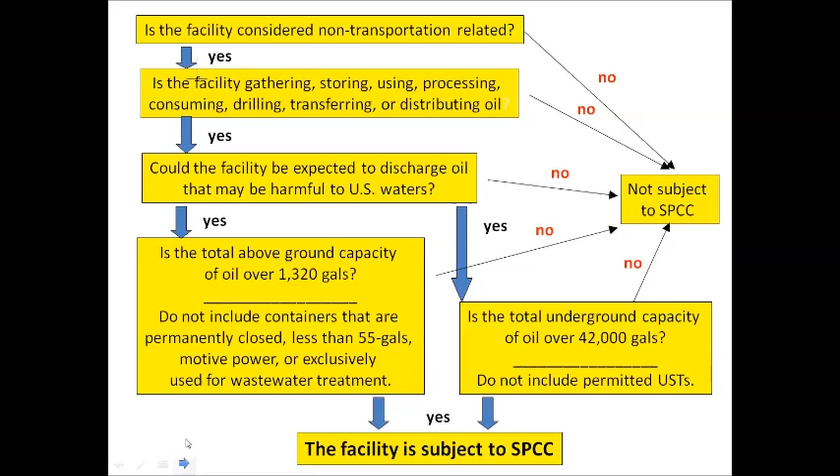I want to invite you to pause these slides on occasion if you want to study them. This slide basically is trying to give you a little chart for whether or not you need an SPCC plan. I put it here for a review for your study.

This is typical of what I see for ag tanks on farms. They're single wall tanks. They don't have saddles or rails. We call them skids sometimes. A limited amount of openings at the top. They basically were planned to be on stands, but obviously they got used in different ways.

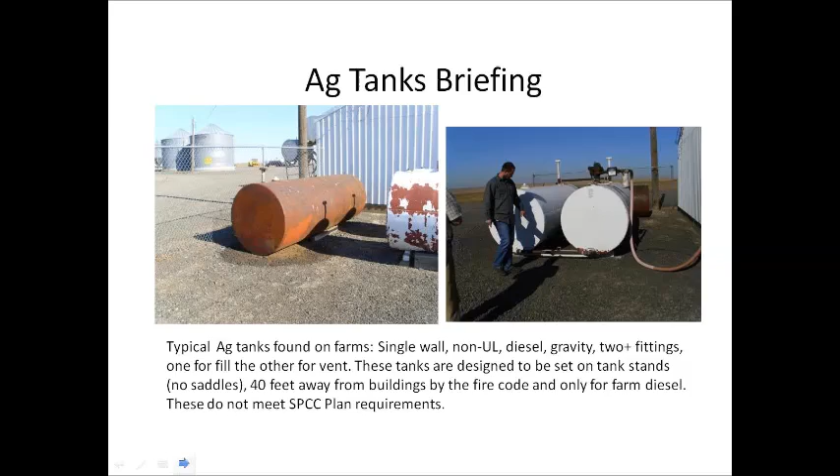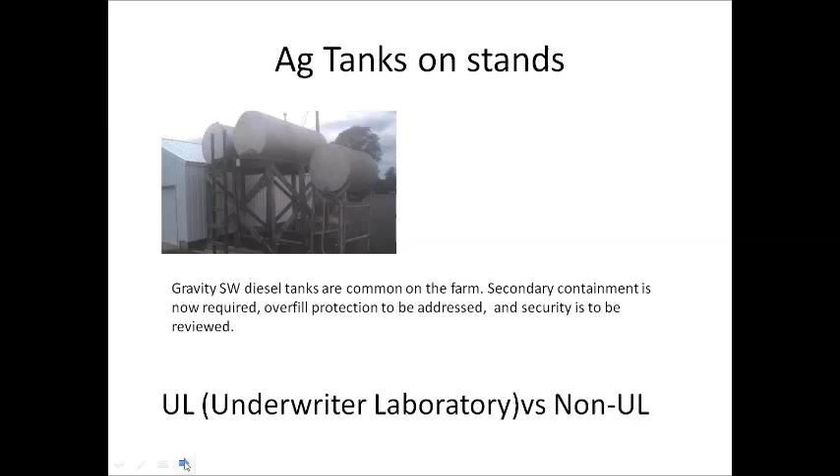As I mentioned, these ag tanks were designed as a non-UL tank, basically a gravity feed kind of operation, and designed for diesel. But today, the SPCC rule requires secondary containment for these tanks, and so now we have some new issues to work with.

Some of the issues that we're going to address with the SPCC rule in order to become compliant is, one, you must get the tank off the ground. In other words, you need to supply saddles or rails, somehow get the tank off the ground so you can inspect it on a monthly basis, make sure it's not leaking.

Secondary containment can be several things. Berms are one kind of secondary containment that can be provided. Overfill protection is another issue that's being addressed by the SPCC rule. It can easily be solved with level gauges, clock gauges.

Foundation, again, we've talked about that, saddles or skids. A 1,000-gallon tank, of course, is going to weigh 6,000 or 7,000 pounds, so it needs to be properly on a foundation that works. Grounding: in some cases, there may be static electricity, lightning strikes, whatever. So grounding is an issue.

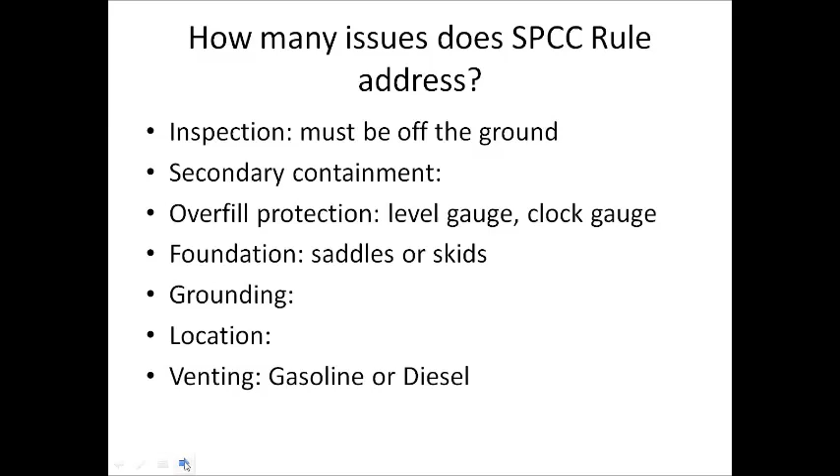Location. The SPCC doesn't actually address location so much as fire codes do. The gravity feed tanks, through one of the national fire codes, need to be 40 feet away from a building or housing. So that's why those gravity feed tanks are generally stationed out in the land somewhere.

Venting is a big deal. Again, fire code addresses this, but gasoline is vented differently than diesel. Obviously, gasoline is more volatile.

I was able to help one of our farmers here with a typical ag tank. Again, not very many openings. He chose to put it in a secondary containment and build rails, as you can see, to get the tank off the ground and properly on a foundation, grounded also.

I provided a little double vent there so he could have a gauge as well as venting for his gasoline. He chose to use gasoline in this tank, which needs venting 12 feet above ground. So I provided those for him. So we were able to convert that tank and get it inside the compliance issues for SPCC.

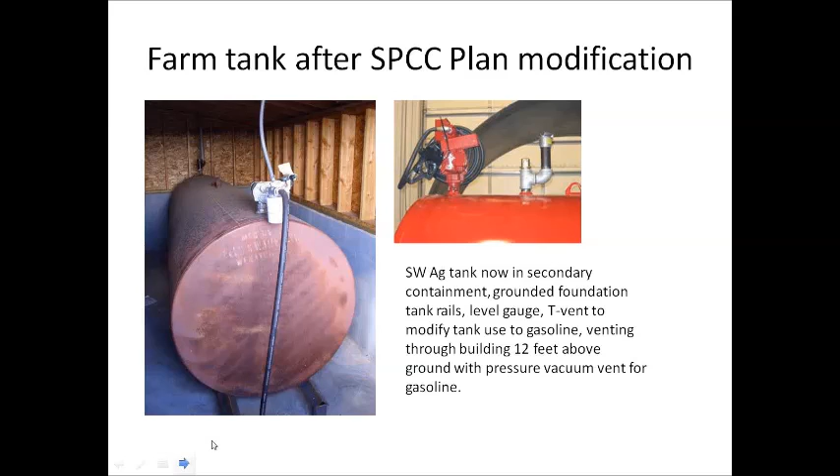Double wall tanks, of course, are a secondary containment and meet the SPCC, but even then, a double wall tank has to be outfitted properly. A spill container would be great. Proper venting, emergency vents, overfill whistle, alarm, or gauges, Krueger leak gauge for the interstitial.

This allows you, for a relatively cheap gauge, to not have to open up the secondary containment and make sure that the primary tank is functioning properly. Lockable pumps, meters, and filters are all part of a good fueling system.

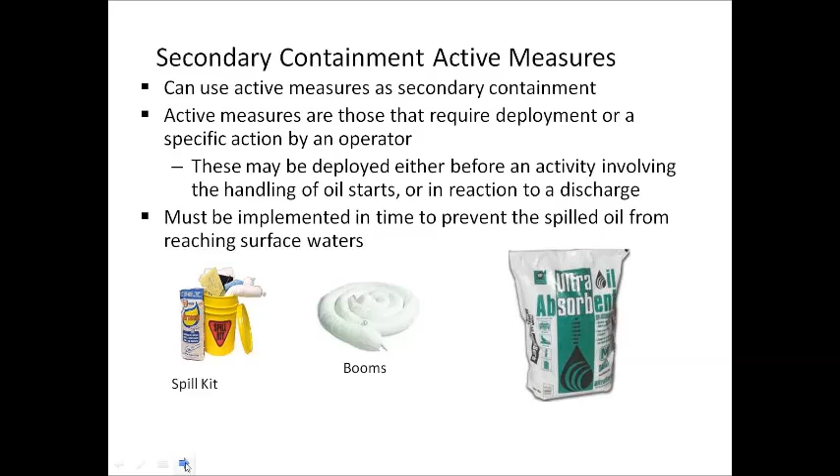Secondary containment for active measures. Basically, every farmer needs at least a spill kit for little discharges and possible little issues that might arise in filling or working around your equipment. And so these products work for that.

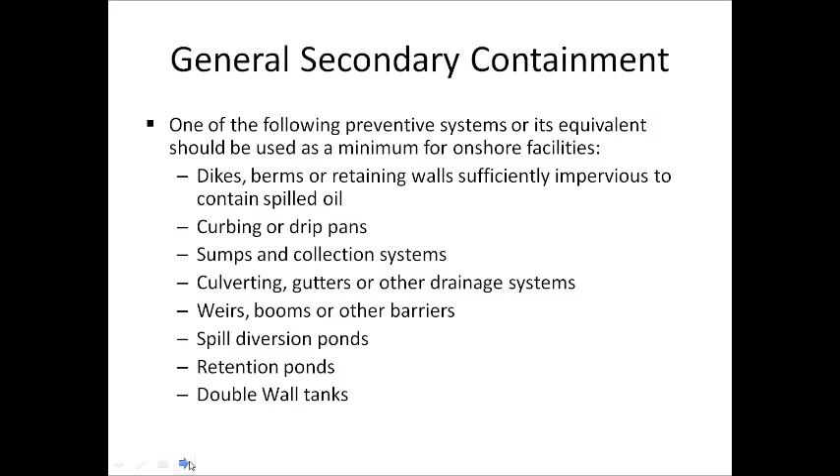For general secondary containment, as I mentioned earlier, there's a lot of latitude, a lot of things a farmer can do. Basically, the SPCC is only concerned with fuels and oils getting to a waterway. They are not concerned with it going into the ground. That's a hazmat issue, and that's pretty expensive, to take those saturated, contaminated soils away.